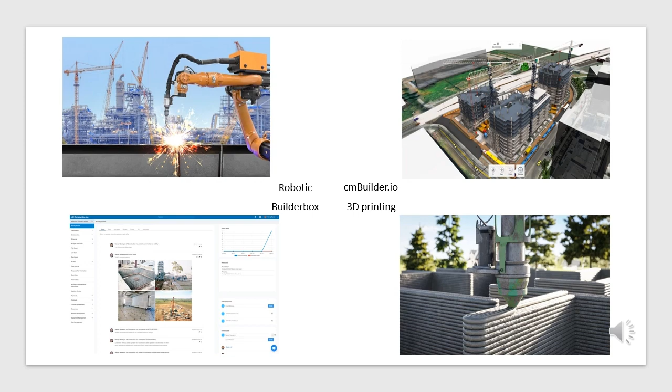Nowadays in the construction industry, we are focusing more on MMC and entering Industry 4.0, which emphasizes the adoption of digitalization and automation in project management. Today we will discuss these 4 technologies to see how technology affects the role of a PM or CM in real life.

I would now like to talk about the impact of technology on the changing roles of construction managers in the next 5 years. Who is a construction manager? A construction manager is a professional responsible for the planning, managing, coordinating, and controlling of all works and resources on a construction project.

The construction managers are expected to keep track of activities and progress by collecting data, recording information, and documenting all stages of work.

In the past, construction managers were usually faced with excess documentation rather than being faced with the actual work. This had resulted in a distortion of information, loss of valuable time, and inefficiency. Also, the time spent on resolving site problems, revisions, and discrepancies using traditional methods of construction management was usually much, consequently leading to increased project costs, extended completion time, waste of resources, and sometimes litigation.

The aforementioned reasons and many more had resulted in the use of technology to solve the complex problems associated with construction projects in the past, which have given a glimpse into the changing roles of construction managers in the near future. Now, let me introduce to you the interface of one of the most powerful construction site logistics platforms, cmBuilder.

It is a platform that provides accessible 4D construction site logistics with fast and easy cloud-based workflows, powerful sequencing simulation capabilities, and unparalleled real-time collaboration.

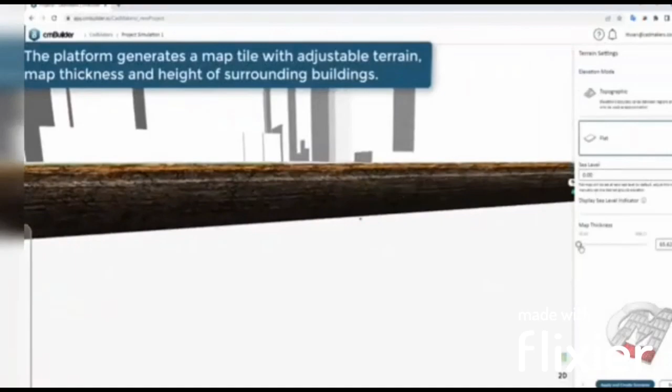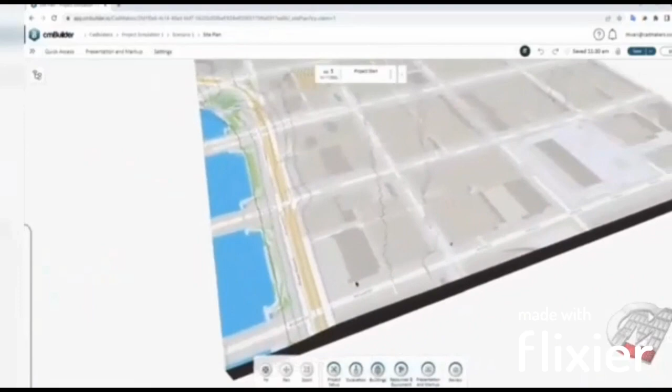You can create a new project at your actual project site location by choosing your site address right on the platform. The platform generates a map tile with adjustable terrain, map thickness, and height of surrounding buildings. With this platform, you can adjust the topography of your site location based on data obtained from surveys carried out on the property.

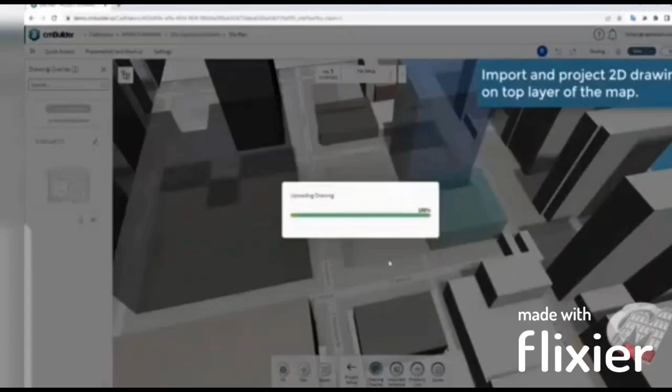Put your 2D on top of the map. You can also upload and locate 3D BIMs by geolocation and/or adjust manually.

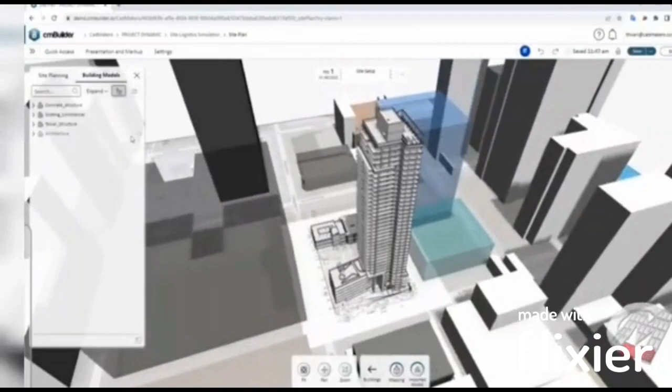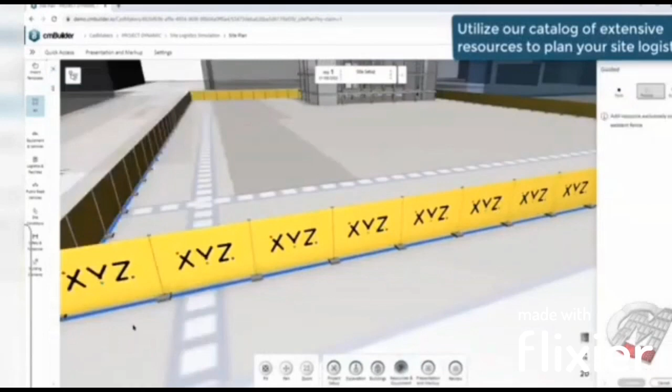The platform allows you to integrate and auto-generate changes from your project schedule to the 4D simulation. It provides its user an array of catalogs of extensive resources to plan your site logistics. You can also animate complex parametric resources from the cmBuilder catalog.

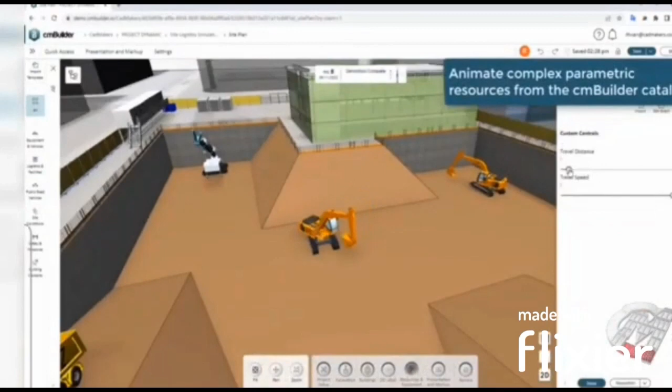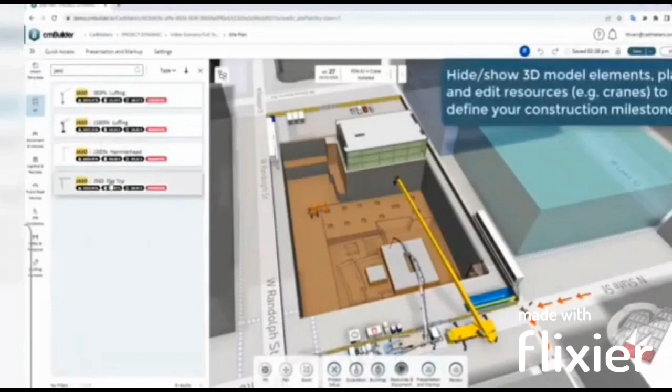Within the platform, you can also create 3D models within the cmBuilder interface. These models can actually be adjusted also on the platform. You can hide and show 3D model elements, place and edit resources, for example cranes, to define your construction milestone.

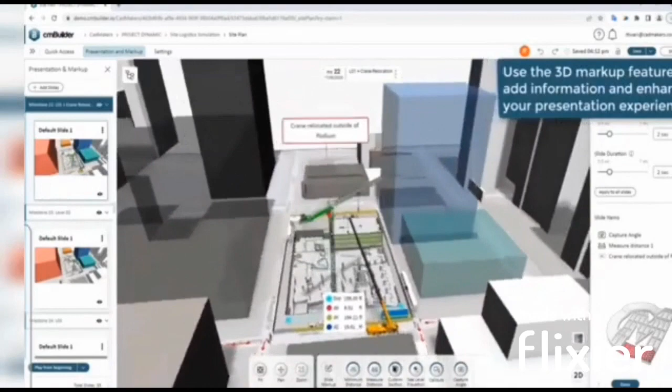You can also use the 3D markup feature, add information, and enhance your presentation experience. You can adjust the display settings to suit your preference. This is how flexible this platform can get.

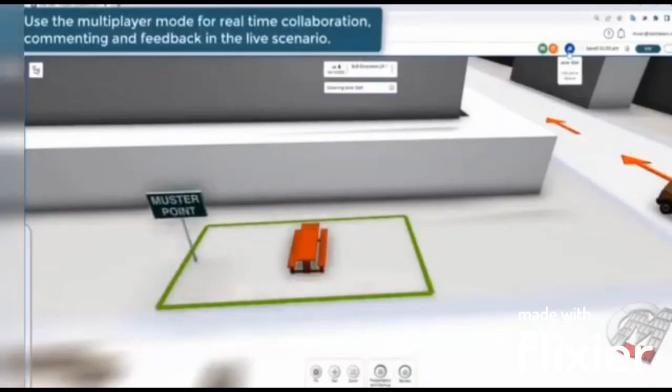Users can use the multiplayer mode for real-time collaboration, commenting, and feedback in live scenarios. One very important aspect of this platform is that site simulations can be shared with stakeholders as a link or as PDF. Stakeholders can open these files with their phones or computers without any need to download any software.

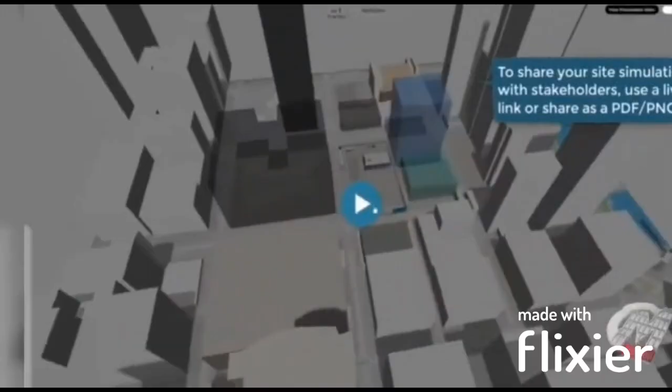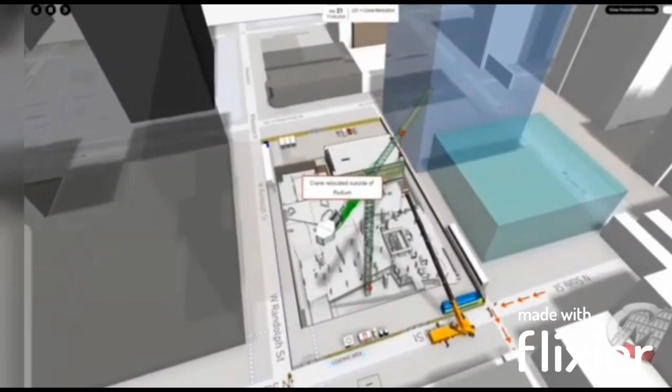In summary, this visual platform, as one of the technological gains of the construction industry in recent time, can help improve the construction manager's duty in planning and logistics. It is flexible and simple to use. It allows integration between other digital platforms, and it can be easily accessible by all. Also, the CM Builder platform allows for better collaboration among relevant stakeholders associated with the project.

There are 4 categories of robotics, and today I will take the example of on-site automated and robotic systems to illustrate how robotics can influence the construction industry.

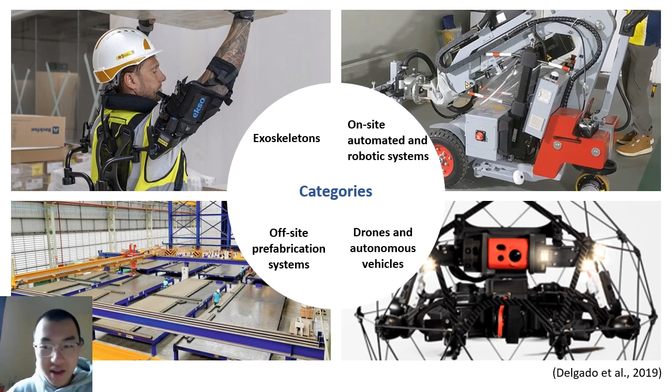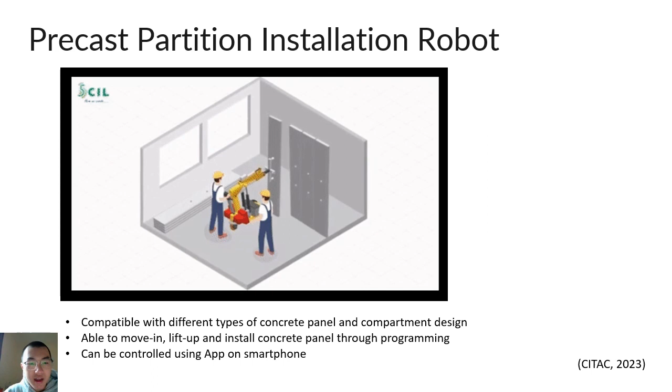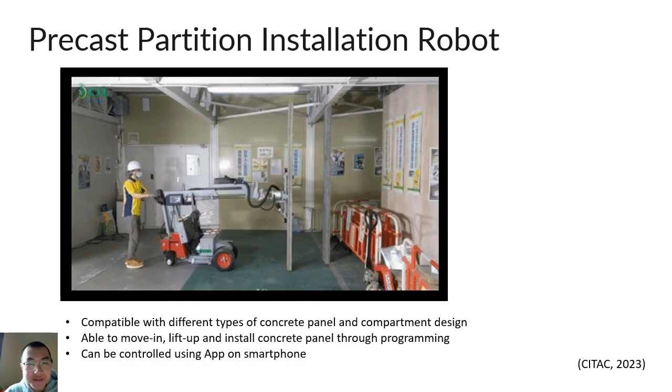By comparing the difference of adoption of new technology in compartment design for the construction industry, in the past we can see that traditional bricklaying posed more health and safety concerns for construction workers and provided a less favorable working environment for workers on site.

But nowadays we have the new technology precast partition installation robot to increase productivity and reduce the requirement for labor force on site. In the future, it is foreseeable that more and more robotic machines will replace human work on construction sites to minimize health and safety concerns.

So construction workers can monitor the robotic work done on site in a central monitoring center, watching the work on a computer screen and controlling the robotic work through programming to achieve better control and better scalability of the construction project.

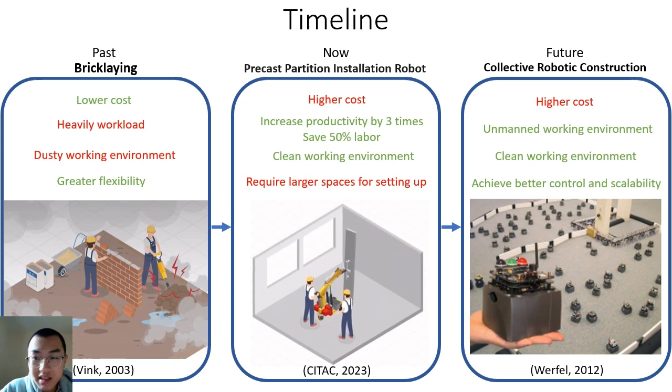For PM or CM, you may increase your workload in the designing stage because you need the adoption of new technology, which increases the overall budget of your construction project. Also, you need more time for planning, such as thinking about how this new technology can be incorporated and managed in your construction project.

You also need to think about whether you have enough people to learn, control, and understand how this machine works on the actual construction site. Do you have an alternative method to continue the construction project if it has a technical problem when you are actually using it on site?

But in the construction stage, you have less concern on health and safety issues or on the quality of your construction work because robotic machines can help ensure precision, efficiency, and safety. For the post-construction stage, you may have to evaluate whether this new technology helped with the performance of your construction project, and whether you will adopt this technology again in your next project.

So Kenneth will now talk about Builderbox, the new technology, and how it influences the construction project.

Resource management in construction projects is usually a big issue, requiring diverse resources to be brought together at the right time and the right place. The use of Builderbox, an analytical software for resource management in construction projects, can make the construction manager or project manager's duty very simple.

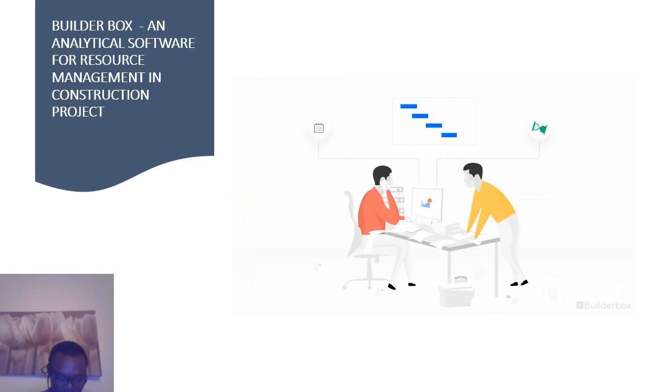Using the Builderbox software, materials and resources can be streamlined and their supplies can be as accurate as possible. The supply chain process can then be very easy to manage in terms of delivery time and place.

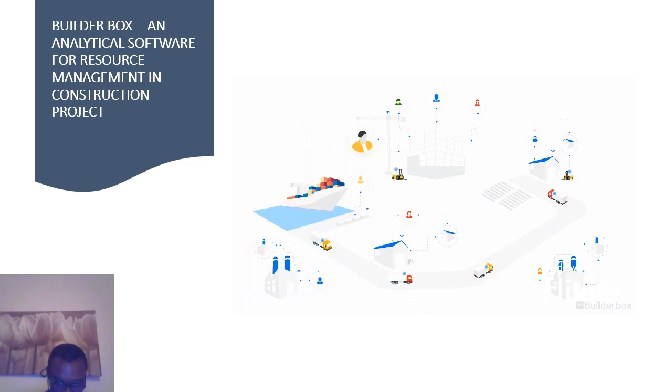Resource planning also has intuitive tools that can help track resources in real time using software, web, and application aids that can improve resource utilization. It has also kept all the stakeholders on the same page and improved their coordination.

So when we ask, with the use of technology, how come most people have yet to embrace this technology? Although resource management software purchase, license, installation, renewal, and training of personnel are very expensive, the advantage in terms of efficiency and accuracy in resource database sourcing, storage, and management far outweighs the flaws associated with the traditional way of managing resources by manual data collection, processing, and storage. So it's encouraged that we should use the software to ease the work of project managers.

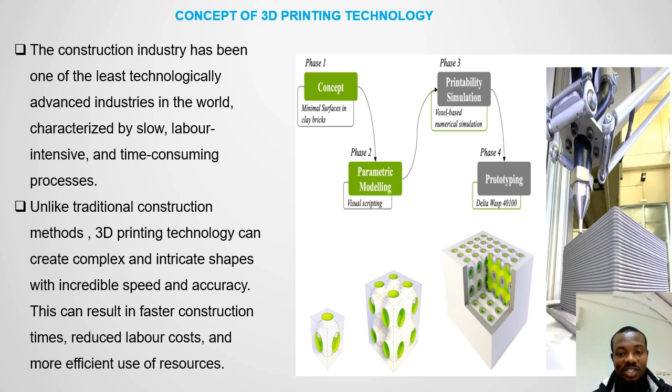Now, what is 3D technology? 3D printing is the computer-controlled sequential layering of materials to create three-dimensional shapes. 3D printing, or additive manufacturing (AM), is technically known for prototyping and for the manufacture of geometrically complex components, according to ASTM.

It was first developed in the 1980s, but at the time it was a difficult and expensive operation, so it had few applications. There are 5 types of 3D printing available in the construction industry: contour crafting, concrete printing, selective binder activation, and selective paste intrusion.

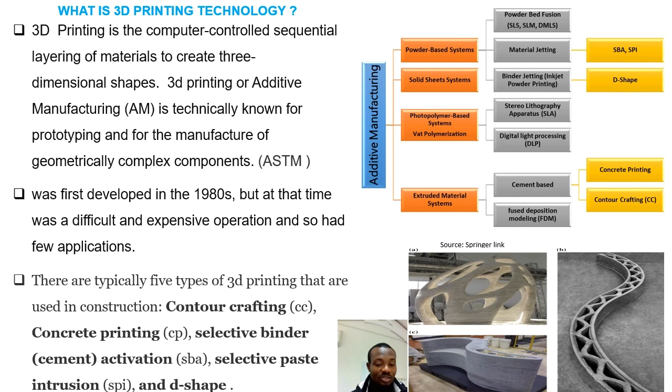Effect of change to the construction manager. A construction project's success is determined by cost reduction, time management, improvement in public health, safety, and environmental sustainability. These are what 3D printing has offered the construction manager over the years. It's also one of the major reasons why the construction industry is always improving and new technologies are being adopted.

Construction techniques: extrusion. This is the most common 3D printing technique in the construction industry. It involves depositing material through one or more nozzles mounted on a robotic arm, gantry system or crane.

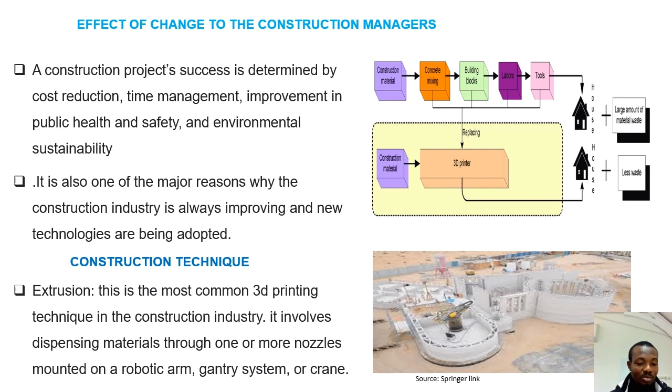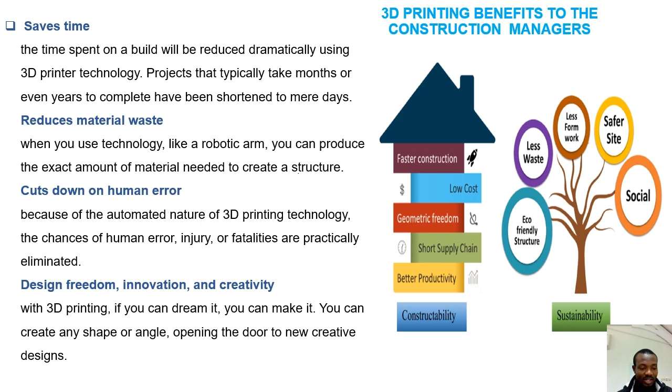3D printing has a lot of benefits for the construction manager: it saves time, it reduces material waste, it cuts down on human error. Because of the automated nature of 3D printing technology, the chance of human error, injury, or fatalities is practically eliminated. It also offers construction managers a lot of space to play around with material.

Having said that, there are also challenges posed to the construction manager regarding 3D printing. We have the need for skilled construction workers because it's a new technology, so there is a need to train more people. We also have exclusion of building services - sometimes when it's being operated, services are eliminated because of the nature of the construction method.

We have structural integrity. It has been argued over the years that sometimes buildings built by this type of technology lack some form of structural integrity. We also have challenges of cost estimation - the use of 3D printing creates a new challenge in an important construction management function, which is cost estimating.

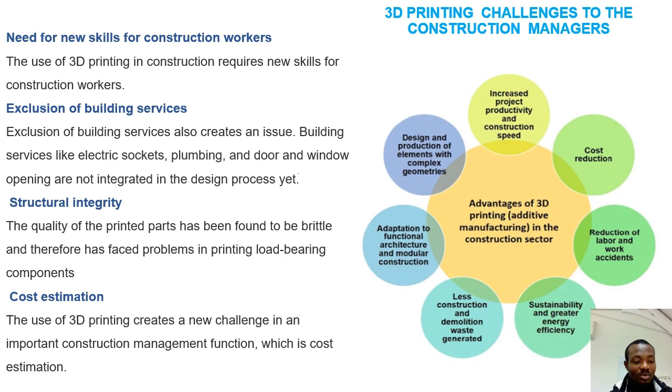Coming to the present now, the current trend in the 3D printing method is the creation of a 3D digital model, which can be developed using a variety of 3D software programs. This innovation is currently gaining massive popularity among construction industry users.

Although the adoption of new technology can attract young talent to enter the construction industry to help address the issue of skilled labor shortage, there are more factors to be concerned about. First, there is a high initial investment cost for the company, so they will have to risk the investment if they are not familiarized with the new technology.

Secondly, there is a legislation concern. For example, UAP is a company that has a concept design of delivering parcels for customers using drones, and they are thinking about expansion to the construction industry to help deliver construction material on site. But there are regulations restricted by the Civil Aviation Authority on the utilization of unmanned aerial vehicles on the construction site. The third factor to be concerned about is the greenwashing problem.

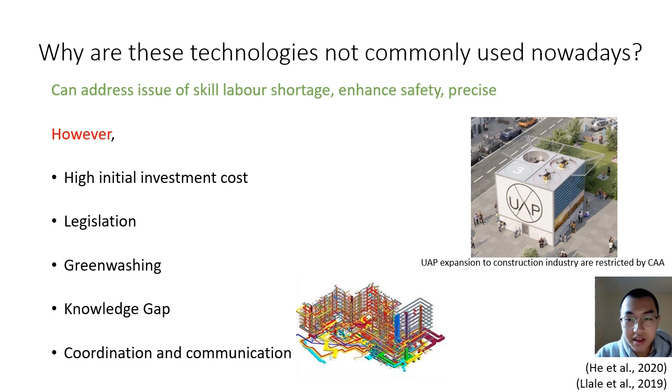Finally, here is some advice for project managers and construction managers in the future. First, you will have to have high adaptability because there may be new policies, new requirements for you to use new technology in the construction project.

You need to have agile thinking about how they cooperate in your project, whether they are suitable for your project or not. You will also have to have high willingness to learn because there is more and more new technology coming to the construction industry in the future.